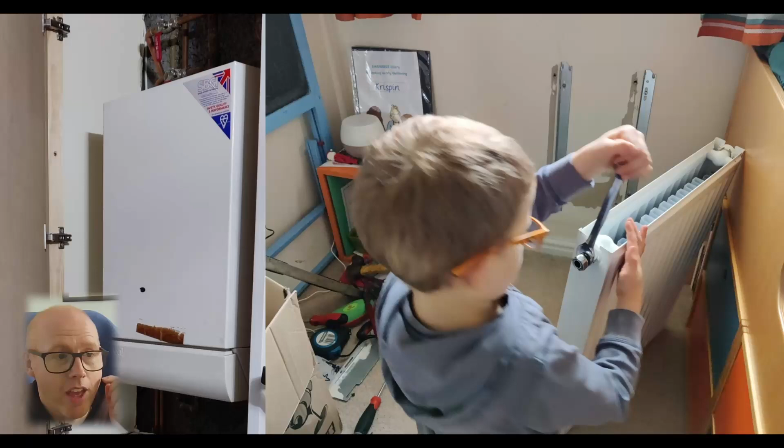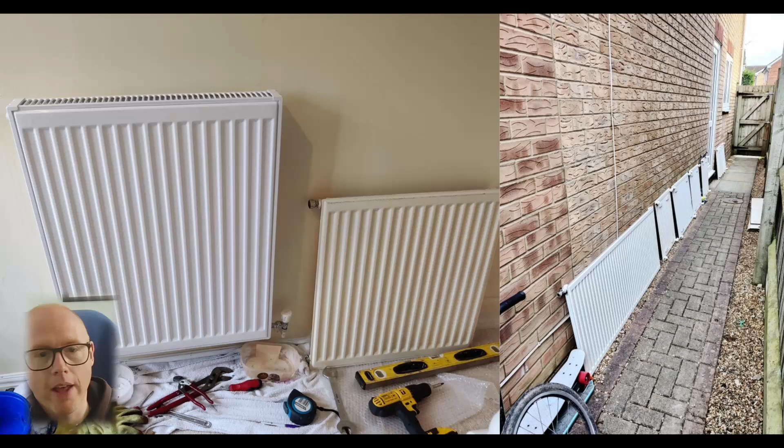A quick recap if you're new to the channel. On the left there is our old gas boiler, non-condensing, very inefficient. On the right you can see with the help of one of my trusty assistants, we set about upgrading the radiators, and most of them we tripled them in size. If I move here, you can see that we went for some that were taller. We went from single panel to double panels with convectors, and you can see our little alley down the side of the house that became a radiator graveyard as we slowly went around the house upgrading those to prepare for a heat pump and to make it efficient.

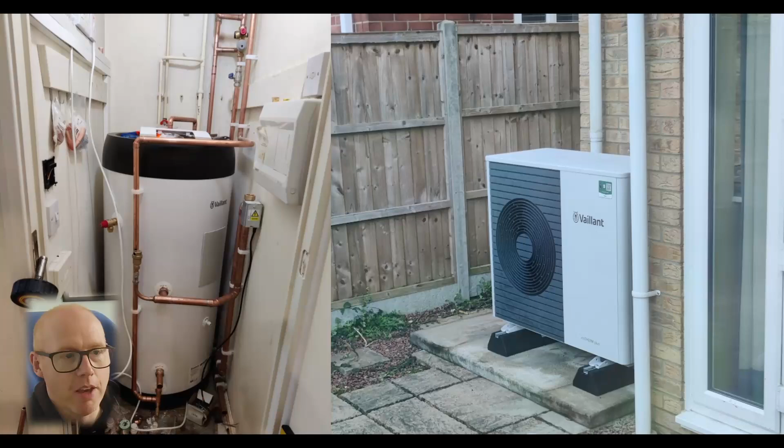Eventually we had an installation from British Gas. Yes, shock horror. We had a Vaillant 7 kilowatt Arotherm Plus installed with the Vaillant cylinder and Vaillant controls, and we run it fully weather compensated, no internal room influence whatsoever.

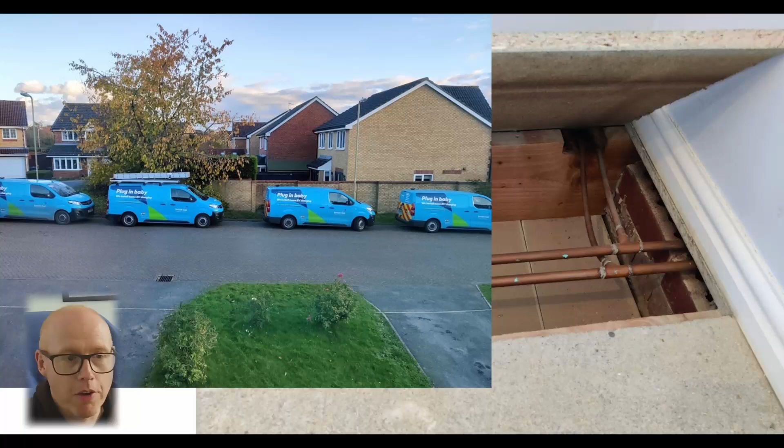And something to bear in mind, one thing that may be affecting my efficiency slightly, on the right hand side there you can see some 15mm pipe running horizontally, and that spurs off to 10mm microbore. So nearly all of the radiators downstairs have 2 to 2.5 meter long 10mm microbore copper drops that go to those radiators. No issues at all, no problem. And reminder that it's a British Gas bargain basement installation, so this is not a fancy Heat Geek Elite or Heat Geek Assured one.

Okay, these are my actual figures. You can see that the heating COP was up at 4.41. The domestic hot water was at 3.59. I'm pretty confident that I've optimized the settings as much as I can. The only way that I could get better performance from my hot water cycle is by having a different cylinder that has a larger capacity coil with more volume. Unfortunately, the Vaillant ones aren't the best. I didn't know this when I was researching. They're good. There's much worse out there, but there's also much better out there that has a much larger surface area that can transfer the heat energy from the coil into the stored water.

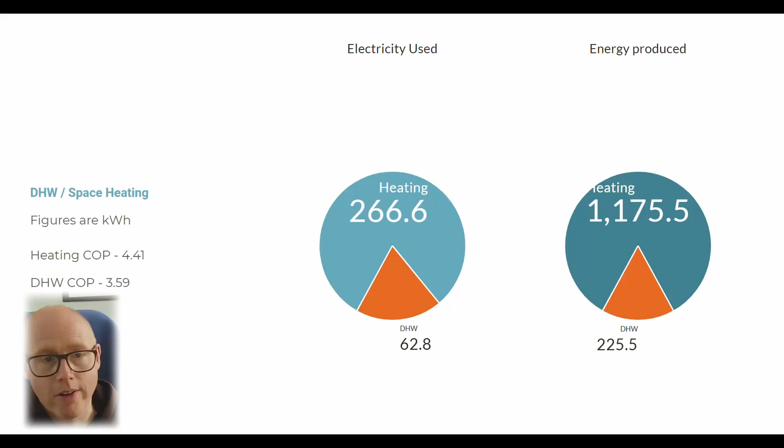Anyway, here's my figures. You can see in the orange is the domestic hot water, and then the teal or blue, depending on how well your screen is calibrated, is for the space heating. On the left pie chart is the electricity used, and those figures are in kilowatt hours. On the right hand side is the energy that's been produced in kilowatt hours.

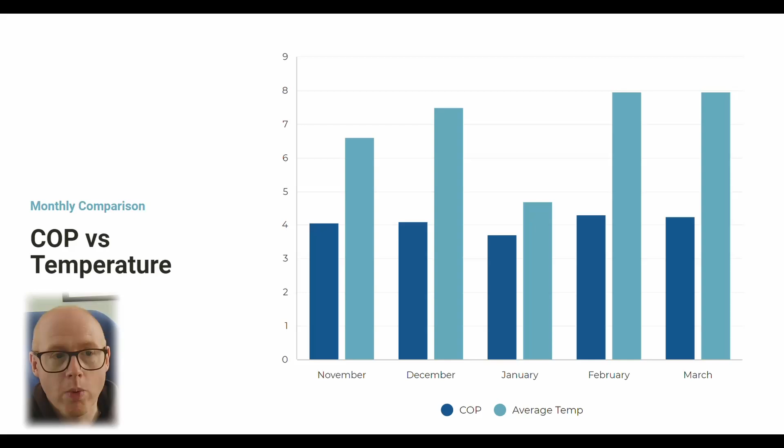Right, so here's a month by month comparison now since we've had the heat pump installed. You can see that our COP has fluctuated slightly above or slightly below 4 in the dark blue, and then once again in the teal you can see the average temp. Apart from January, which was cold, it's been a fairly mild winter, and so once again you can see February and March, it's almost exactly the same, not much difference there.

February running costs was £23.58 for all of that, for a lovely warm home 24 hours a day and very comfortable and nice. I'll show you some of the breakdown of that. It's only that cheap because of the solar. If we didn't have solar, it would be £59 on the tracker tariff. If we were on the price cap, it would be £95.

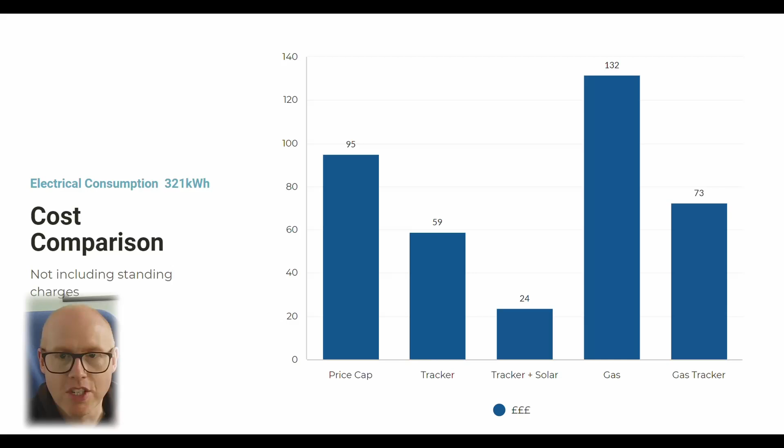Bearing in mind that the gas figures used here are for an 80% efficient condensing gas boiler, which is the typical efficiency of most homes in the UK. Yours may be slightly higher if you've got good controls and you've got good capacity and everything else, and you're running the system well. You might be a little bit higher than that, but there is potential that you may be even worse than 80% as well.

These are the figures as of March, so I'm aware that by the time this video goes live, the price cap rates will have changed, and that does change the delta between the running cost of a gas boiler and a heat pump, and the heat pumps are going to have to be a little bit more efficient if we're going to reach that cost parity or better. But anyway, if you could get your heat pump at 4.5, then you're really winning. If you're at a coefficient of performance of 4, then you're winning, even with the new rates, which I'll probably go into in my next video anyway.

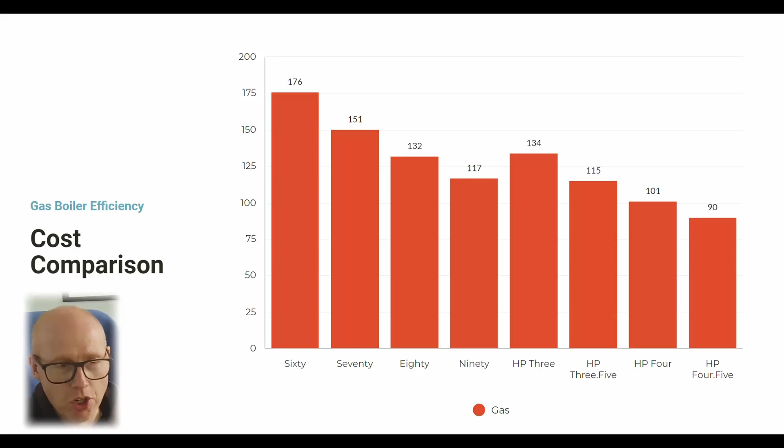I think that must be even including the standing charge as well, because I think that's about £34, £35 or something, including standing charge. But that is also including a little bit of solar. So in some of the next few slides, I'll go through and break that down for you so you can understand which part of that we're benefiting from solar. And roughly speaking, if it wasn't for solar, we probably would have been similar to the February figures anyway. But as you can see, it's a huge reduction in our bills, hundreds of pounds every single month, and we're very happy.

CO2 emissions are actually where the bigger savings are. We emitted just 34.78 kilograms of CO2. That is based on the carbon intensity of the grid throughout March, and I have in previous months just averaged that over the month, but in this month I did take the daily figures, and they're all imported into my spreadsheet. Took the Vaillant data by CSV, imported that all into the spreadsheet, and also then subtracted the kilowatt hours of solar that we've used for the heat pump, because obviously there's no carbon emissions attached to that, and that's how we arrive at that figure.

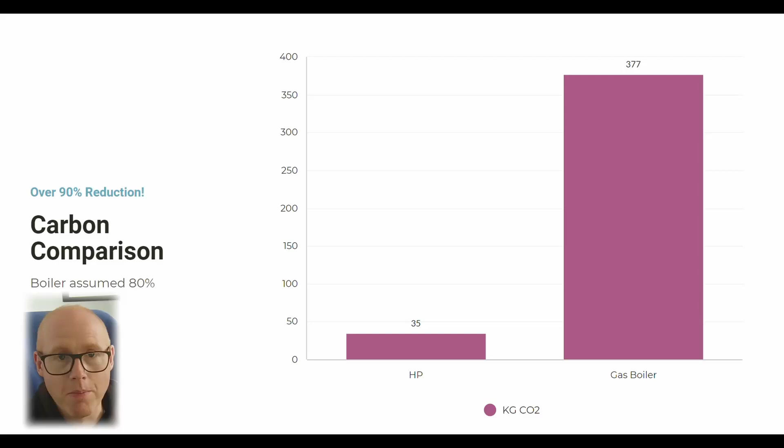If we had an 80% efficient gas boiler, we would have emitted 377 kilograms of CO2. That is assuming that we put the same amount of heat into our house over that month, whether that's blasting more in the evening or whether that's running it a steady state, you know, low modulation, low flow temperature boiler. Still, it's over 90% reduction on your carbon emissions. So if that's your primary motivator, a heat pump is a no-brainer. Just do it.

Here you can see that for the first time, more than 50%, almost exactly 60% of the energy that we use for our heat pump came from solar and about 40% from the grid. That's for a few factors. If I used some eBUS integration and maybe integrated Home Assistant, then I could definitely improve that. There's definitely things that we could do.

I'm also still running my hot water cycle in the evening just because I have to make the hot water last for the whole family of 5. Otherwise, if I heat it when we've got some free excess solar, then it just doesn't last until my shower in the morning and the next morning. So yeah, I'm not really sure what to do about that. I have also considered maybe doing 2 hot water cycles, but it's not very efficient. You really want to get the best COP for your domestic hot water. You want to heat the tank from as cool as possible. You really want to empty that tank out before you reheat it.

Okay, if you really want to see all the figures, rubbish, my screen grab has cut the bottom off. Anyway, pause this if there's anything interesting in there to you. Last time round, I cut the top off, and this time I've cut the bottom off as well as all the totals. But essentially, you can see how the temperature fluctuated throughout the month. That middle part of the month was very nice and warm, really, for March. It was good temperatures, and then the temperatures fell back down a little bit towards the end of the month. You can see the carbon.

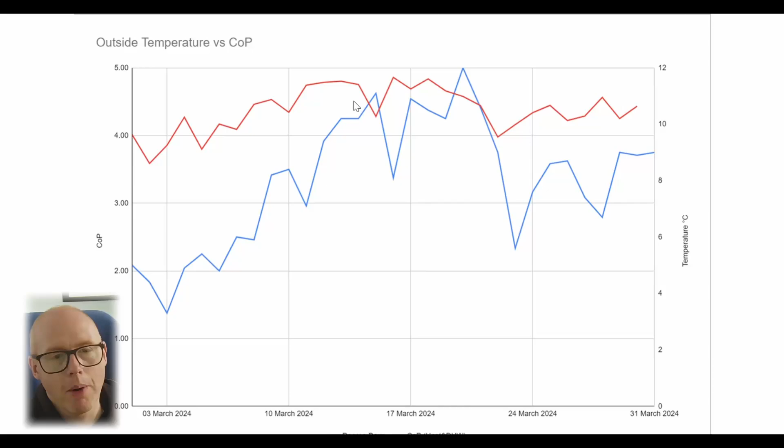Here throughout the month you can see in the blue line is the outside temperature and the red line is our COP, and you can see apart from the couple of cold days at the beginning and one little day, I think it was 5.6 degrees on that day from memory, that it dropped below 4. Otherwise we were comfortably over 4, and there are a couple of peaks there where we were getting up into the high numbers. You can actually see back on this page, it's this column here, the green one. What was our highest figure for that month? 4.86, 4.8, 4.84. Yeah, so we did get better days in February actually, where we got slightly better, but that one, for example, 4.86, it's 10.9 degrees outside.

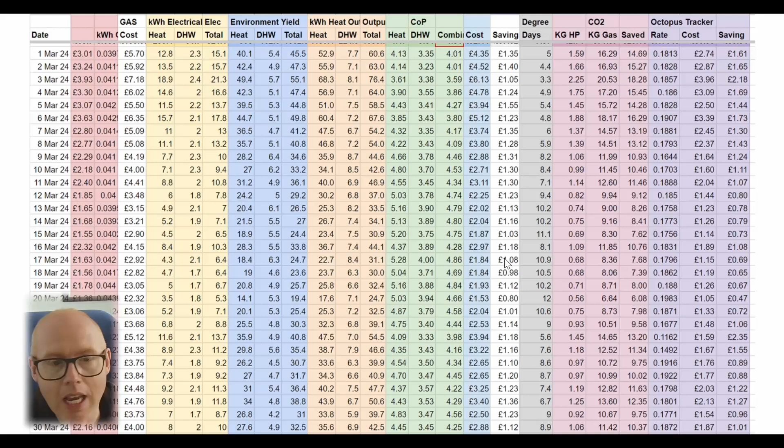Okay, this moves us into the comparison between the 2 winters. So if you've stuck around to this part, this is probably the best bit. So I hope a lot of people are still with me.

This is the winter just gone, so the one that we're just coming to the end of now. I mean, 20th of March, it was officially spring, so we're officially out of winter. But anyway, the total heat pump running cost, excluding the solar for the whole of winter, that's from installation day, the middle of November, was £334.22. Our total COP, when averaged out, was 4.02, so we just made it over 4, which I'm very happy about.

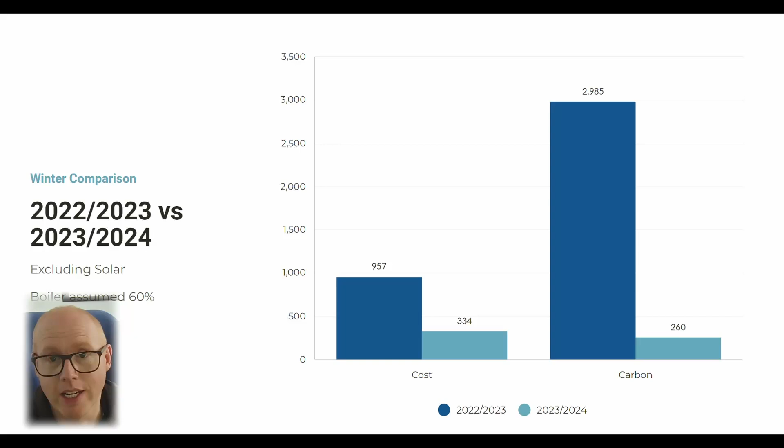But the biggest saving, of course, which kind of skews the scale here a little bit, is the carbon reduction. That is just ginormous. Once again, 2,985 kilograms, reducing down to 260 kilograms. And that being said, this is also not factoring in the solar. This is just focusing on the heat pump versus gas boiler.

So here's a few of my conclusions as I try and wrap this video up, and hopefully it's under 20 minutes. We'll see when we get to editing. Number one, £623 saved in heating bills in one winter. I'm going to say that the £100 may be due to added insulation. So I'm going to try and give the boiler the benefit of the doubt.

But there's no denying that if you've got a condensing boiler, you're going to save closer to, what did we say here, 1,751 kilograms of CO2. If your boiler's running really efficient, then you might do a little bit better than that. You might be closer to 1,500 kilograms, but that's still a ton and a half of CO2. Depending on how many miles you do, an electric car won't save you that much carbon. Really nothing else you do will save you that much carbon in one purchasing decision. So for us, huge carbon saving. If we split that between the 5 people in the house, then per person, maybe it's not as big. But anyway, I'm waffling, as you know, always.

Number 3, the comfort levels have improved massively. It's hard to overstate that. If we go and visit friends or family, everyone's houses feel cold to us now, even though their thermostats are set higher, but with this steady state heating and the thermal mass, our house is always warm all of the time, and we're not paying a fortune for it. We're saving loads of money. There's no cold and hot spots in the house anymore, and we don't have rooms that are warmer or cooler, so we don't have any of that shock factor to our bodies as well. So we're just so much more comfortable.